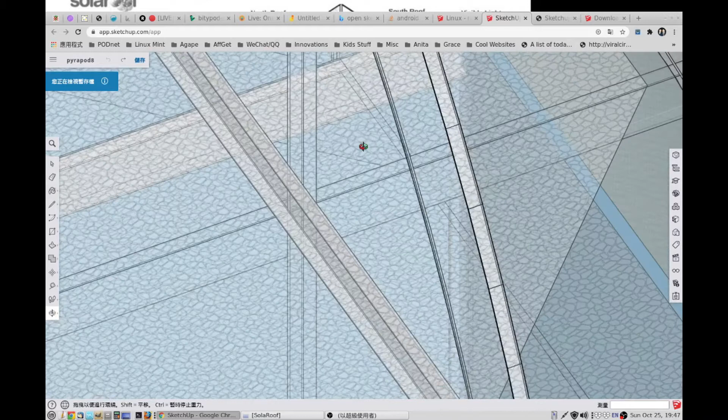From there we build the tic-tac-toe structure, but we build it one beam at a time. Let me zoom in to this area so you can see it's a steel piece — a vertical column, and then a U-shaped piece going this way, down, and then this way.

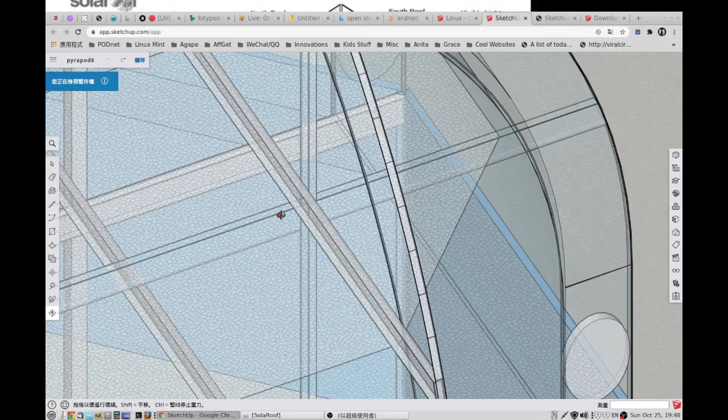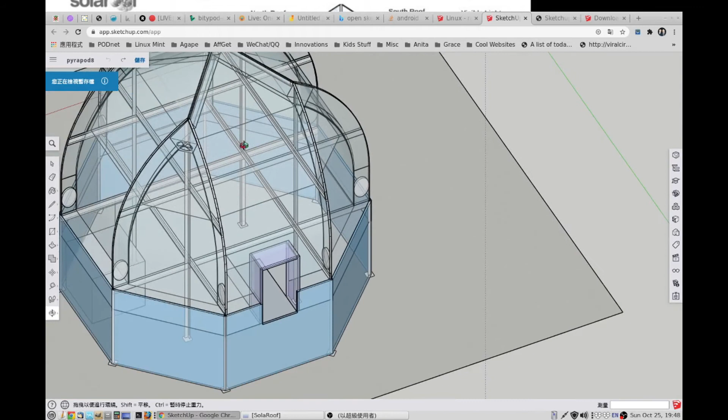So the beam is constructed this way. We're going to drill holes right here, two holes here, and the same for this piece. We'll use a bolt to tie it to the column. So there are 4 columns, and this way.

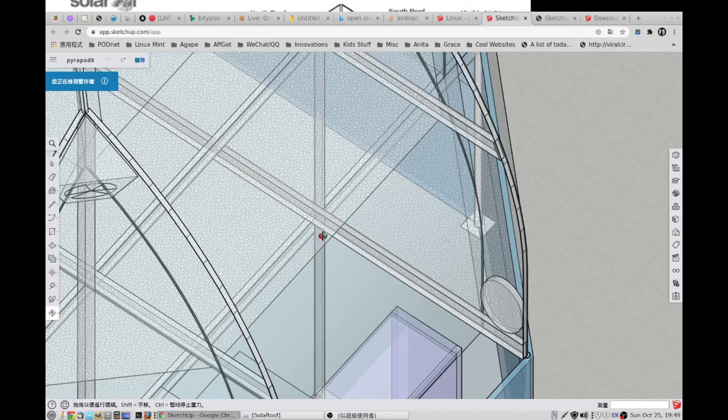We simply put each beam one by one. For example, for this section, we first do this one, tie it to the column, and once we finish this and that, we put this on top, just sitting on it. Then once we get the 4 columns up...

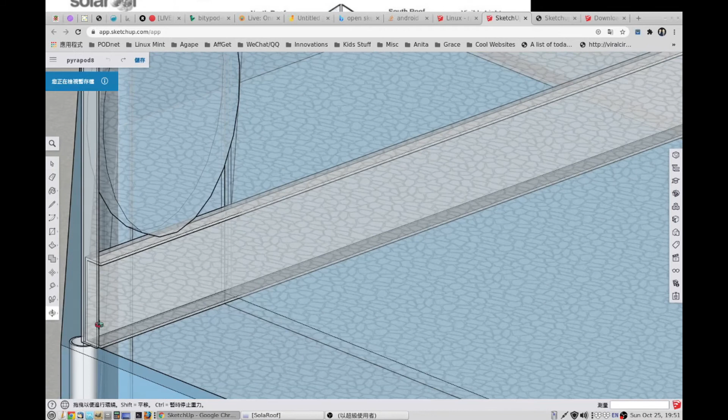On the end of each beam we do a cut here. When we ask the fabricator to make this for us, they will actually weld a piece over here to this horizontal beam, then drill 2 holes, and through those holes we tie up to this piece. We'll make it in a certain way so that the bolts are not protruding from here. So that's how it's constructed.

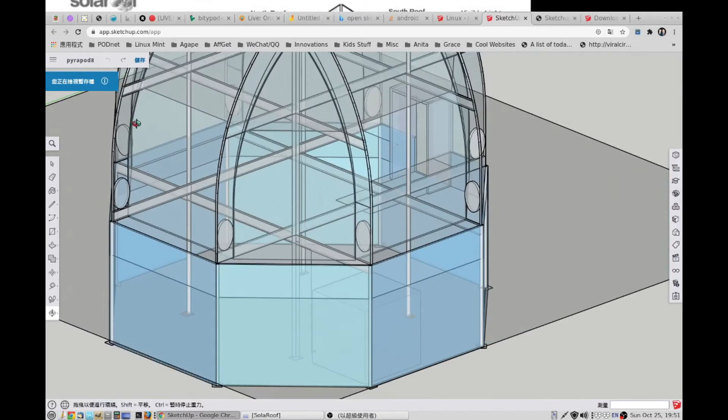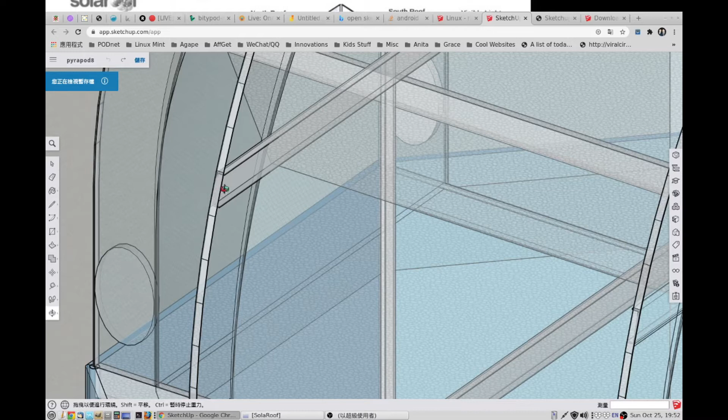Same thing over here — let's go here. This we simply cut at an angle, probably 70, I would just guess 75 degrees, so that this metal piece is attached. Same thing over here — we're going to ask the manufacturer to weld the piece with 2 holes, then use bolts to hold this piece against that, so it automatically bends according to that shape.

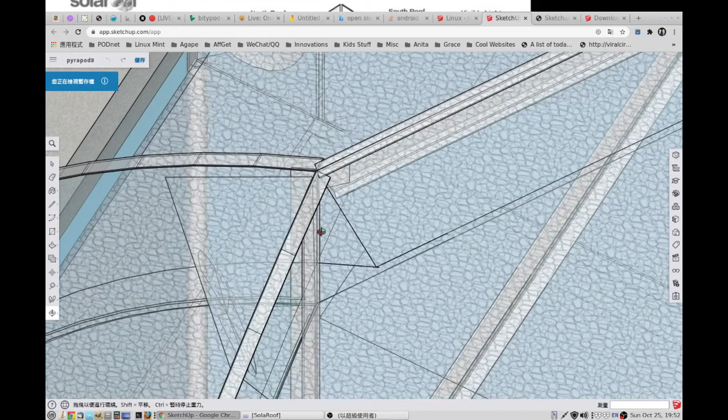Same thing over here, we do on the top. The top will be slightly — it will be something like this, basically a vertical column, and this thing will attach to that. The manufacturer will work on the details so they fit.

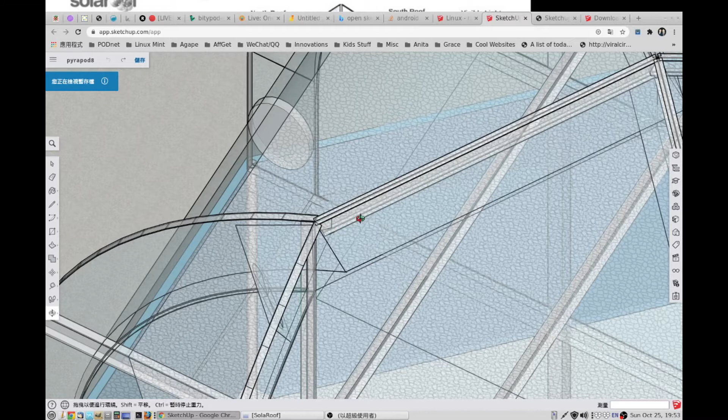And also from here we can use similar material — we're using the I-beam. If you cut the section, it will look like a capital I. We use that kind of beam to make the top for the pyramid. So that's basically roughly how the top for the pyramid joins together.

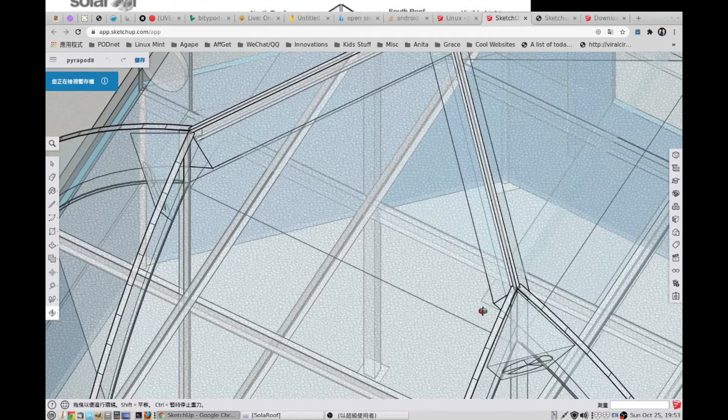This is just a simple illustration — the manufacturer will figure out how to actually do it. This isn't a detailed one, but it shows roughly how it's constructed.

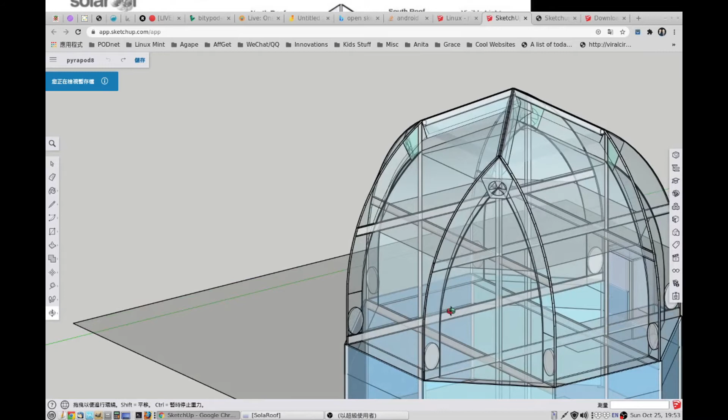So this way we got tic-tac-toe on this level, tic-tac-toe on this level, and at the bottom we design it so we dig 6 inches deep from this line. This line represents the grade level, the ground, and we dig below this, and that forms our fish tank floor — fish tank, soap/liquid tank, and maybe one more tank for domestic water. That's the bottom, and that's the general structure.

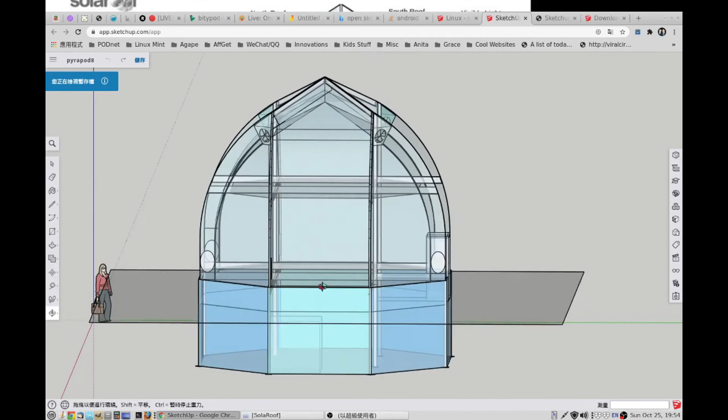And here's the entrance. So here's the entrance — basically the same, we build a platform.

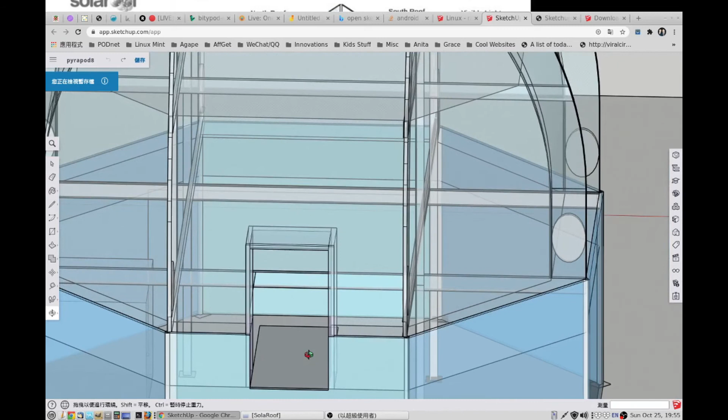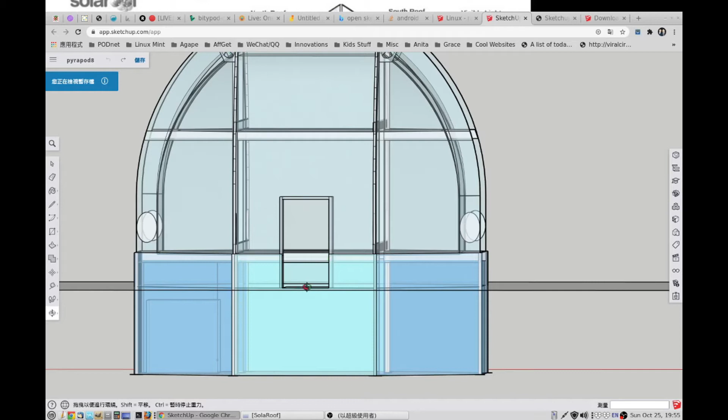We build a platform. We haven't even drawn the detail for the support for this platform, but something like this, right? You walk in and then you come to a platform, and then the second floor, this floor, it just... see here, when you're walking, then this floor is actually just 2 feet up from this level. Yeah, so that's how it is.

And we temporarily put the liquid soap tank there. We could actually move that tank to here, so that it's underneath, right? Just this platform would go above the soap liquid tank. But that's a small thing, I just wanted to let you see.

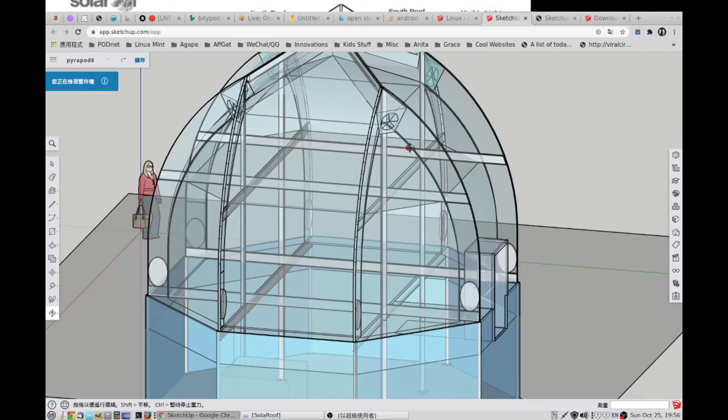As you can see, this is a double layer, double glazing structure, and this shows the cavity, right? This cavity, and yeah, we call it the quad panel, and this is the X panel. The reason we call it the X panel is because if you look from the top, you see this X shape, right? X structure, and this panel actually extends all the way to the top, so that's why we call it the X panel.

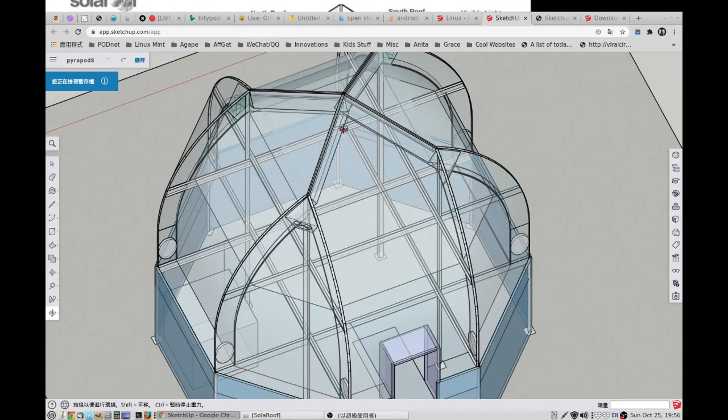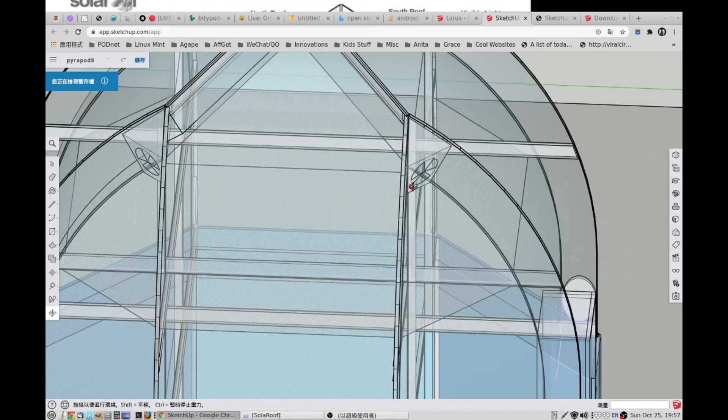This is the quad panel, and as you can see, the soap bubble generator is fit here. Probably we're gonna do this with 3D printing, right? 3D print this generator, so it fits perfectly into that corner. And that's how it is.

And I'll explain quickly, we're gonna have an animation, right? Once the animation comes, then you can see visually how things are moving around. Basically the liquid will be pumped from the tank, and then brought up to the 4 bubble generators, and then sprayed, right?

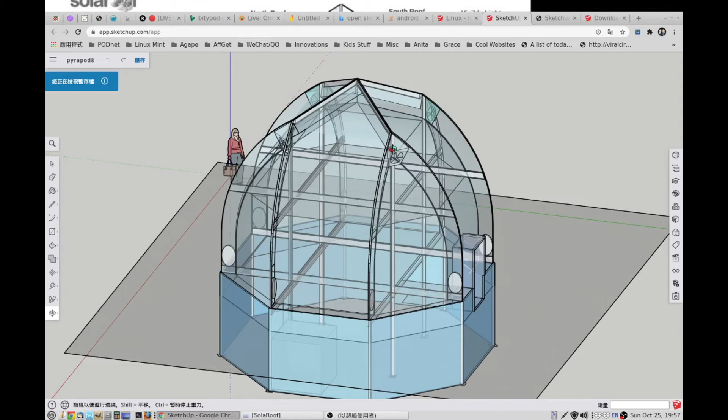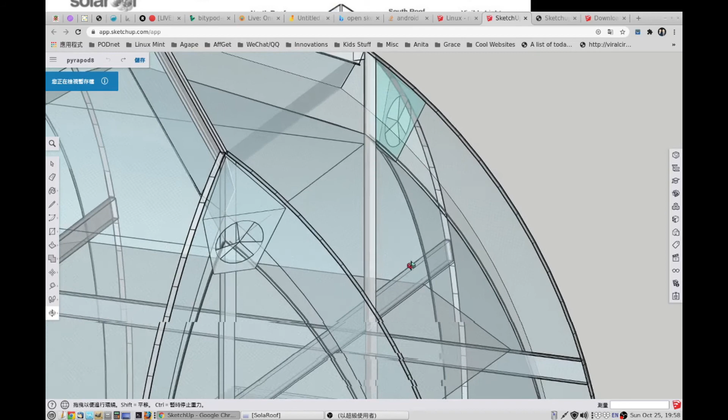Spray again onto this, so I'm gonna show you on the screen. The screen will be in this kind of light bluish color. So basically the liquid will spray here onto that screen, and also spray onto the other side. Remember this? This bubble generator has two sides.

Basically this face is the fan. The fan draws air from below. Okay, that's important. In the beginning I thought the bubble spit out from here, but actually it's the reverse. So in the beginning there's nothing, right? This is empty with only air. So the fan turns on and draws air from below, and then the air is pressurized and sprays out from this side and this side into the X panel cavity.

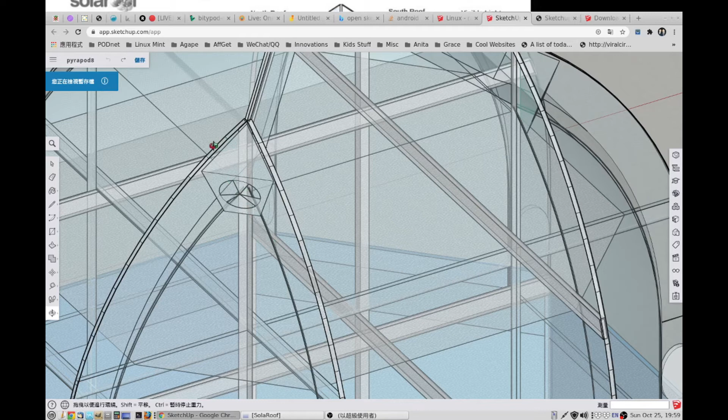Okay, so both ways. So as the soap liquid sprays onto those two screens, and the air will force them, right, and blow onto the screen, forming a lot of bubbles. So the bubbles will actually spit out, shooting up to the top, in this direction.

Actually, several of them also go this way and that way. So in this fashion, the top of this greenhouse, the top portion of the double layer cavity, will be filled with bubbles, and the bubbles, as they fill, will by gravity come down.

And as the air is drawn from this area, and then the air will be pushed in, there should be a balance, right? So basically if you don't spray any liquid, you can imagine how the air moves - the air is drawn from here and then spits out from here into this area, the X panel area, and the pressure will increase. Then that increased pressure will push the air back to the bottom, and flow back coming from here.

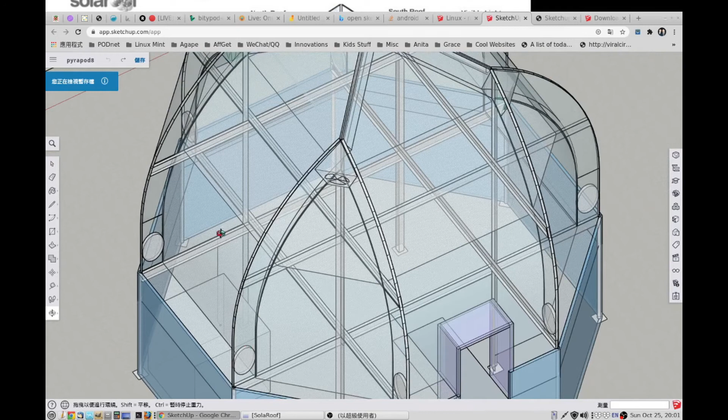So basically we're going to see a pattern, a flow of air going this way and going this way. Okay, so that's why we drew this kind of oval shape opening. This just shows how the air flows, and you can see it's roughly the same in the two areas, because we want a smooth flow of air. So it's the moving of air that draws and pushes the bubbles, creating the bubbles, and then also pushing the bubbles, and eventually, as the top is filled, the bubbles fall down.

And then eventually this area will be filled with bubbles, more and more, until to a point the tip, the top of the bubbles, will reach this fan, to a point that the bubbles are actually drawing into the fan and spitting out again. So if you don't stop it, the whole thing will just move in this fashion, which is actually hard to imagine, even for me in the first place.

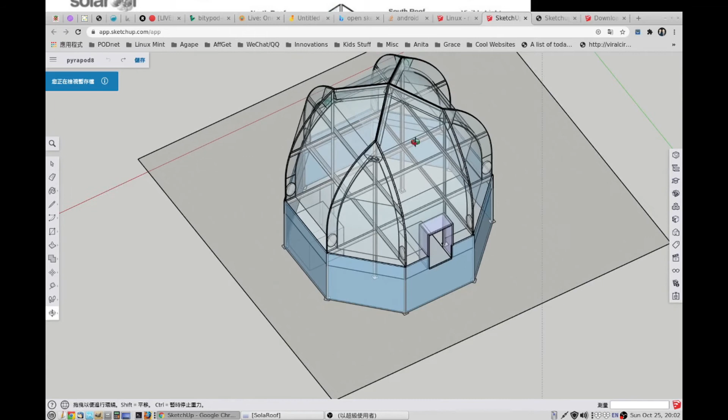Then that's critical, right? That is critical. Remember, this cavity, this double layer cavity, is actually sealed, completely sealed, with no air coming in and out. It's only the air drawing from one section, going through this process, and coming back. So it's a circulation of air. That's how it is. That's why it's critical to do it this way.

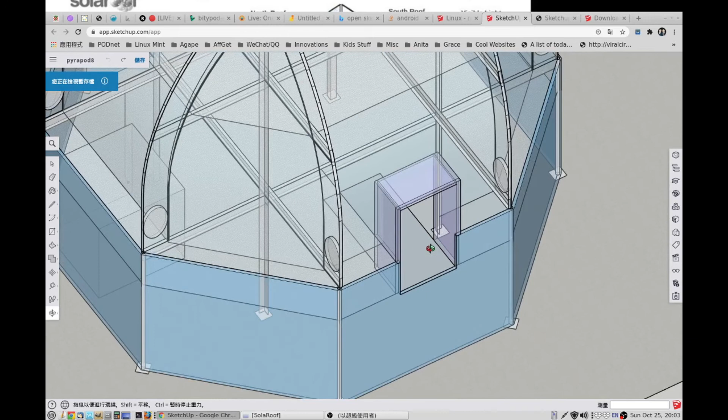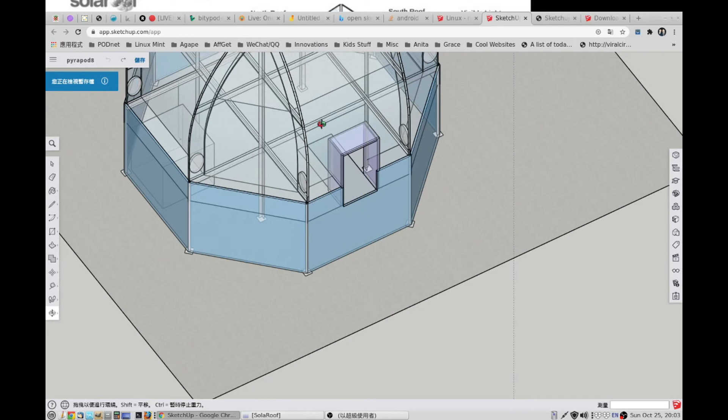And this is the passage. You see here the entrance, and between the outer layer and the inner layer, there's a distance, right? That's the cavity. So we have this door passage, doorway kind of, and then the platform. I think that explains most of the things you see.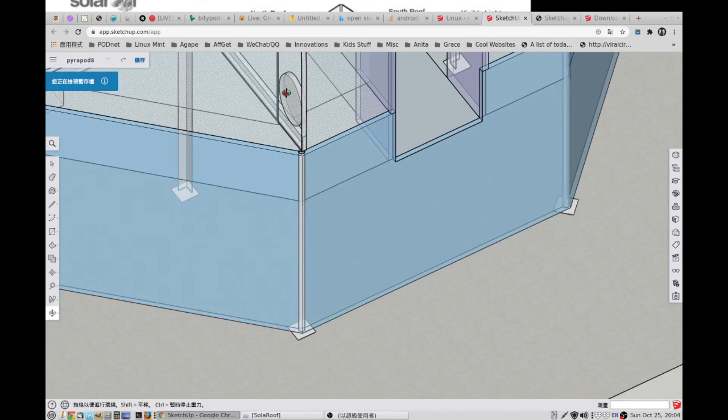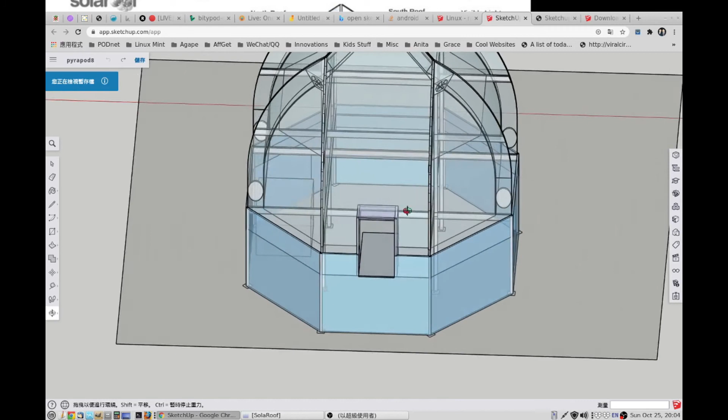And here we use it because this is below grade, so here we use a steel rod, a rounded steel rod with a base, and then the beam is simply placed on top of this round column, side column. I think that's it. So you get the idea, right? So you can maybe look at it. Very neat design, I think this is genius.

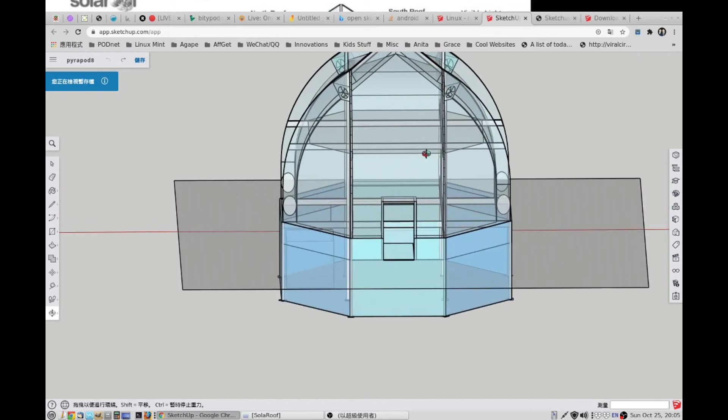This is genius, and I quickly explain, Richard explained also the exterior. It's double layer, right? The exterior covering is one piece, and the inner one we make it in a way that it looks like a bag.

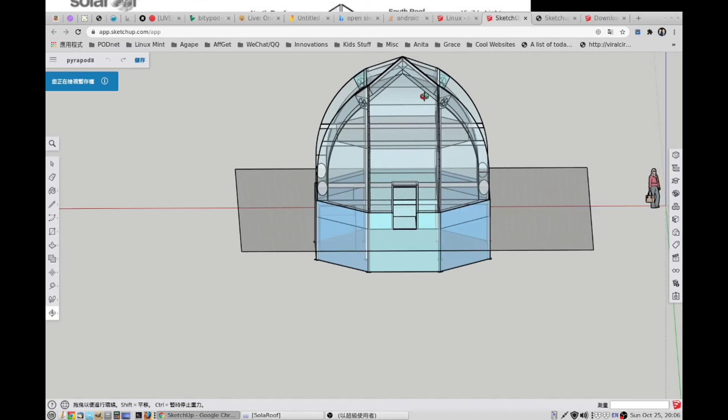It's a bag, and so for that we'll get into the detail. Basically this is a two-step process. One, we got the exterior covering. We'll ask someone to join the fabric for us and sew them together, and then cover it. And then we can start the inner work with this covering. And then we'll ask someone to come and check how we explain on site how we're gonna do the inner layer. The inner layer is a bit challenging, so they come on site and look at it, understand the whole process, and then they can make the bag. The inner section should be built separately, and then connect together.

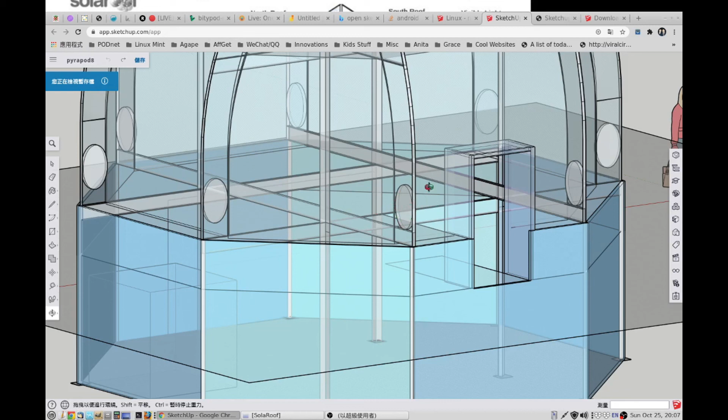For example, this area is double layer, but then we make a hole, like this, so that the two sections connect to each other, so that the falling bubbles can actually be pushed back to where the air is drawing from. Okay, so that's how it is. I hope you understand it.

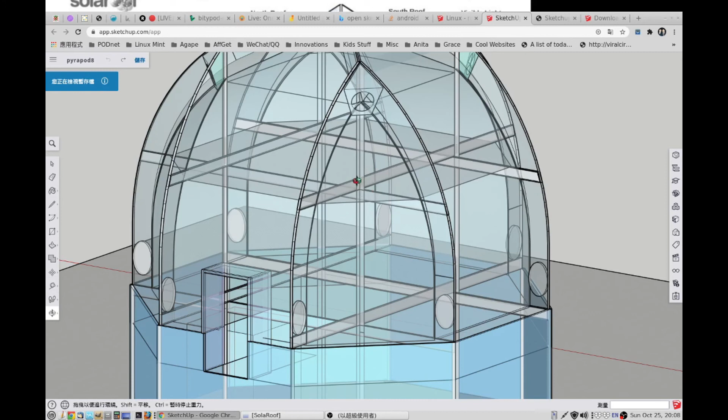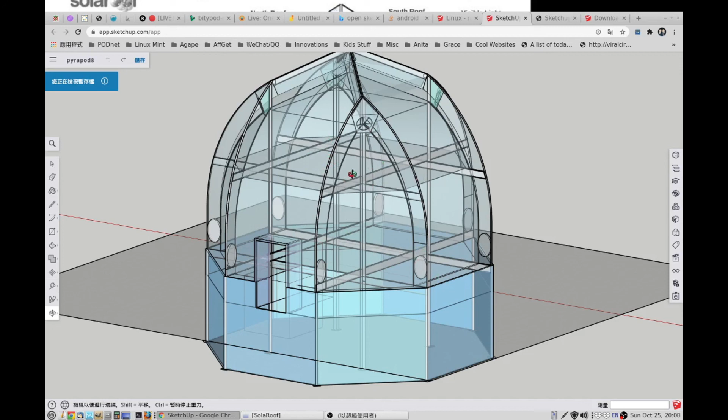I'll probably just insert some pictures showing how to make some joints. Basically this beam is roughly 24 feet, everywhere, almost everywhere. Here, here, and here, so 1, 2, the 4 pieces here and 4 pieces here, 8, right? Then 4 columns, that's 12 pieces. So 24 is a bit long for transportation.

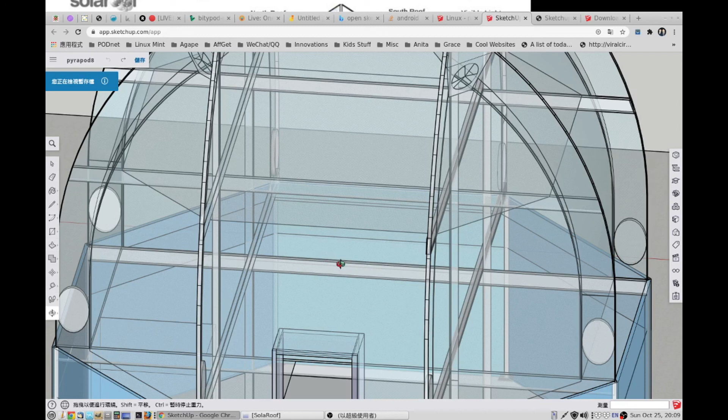So that's why I'll insert something to show how to break the 24 into half. A cut, basically a cut here, simple welding to weld a rectangular piece to the end, and same thing over here. So then 2 holes drilled, and then we use bolts to bolt them together. So that's how we break this beam, all the beams, into half, so that it's easy for transportation.

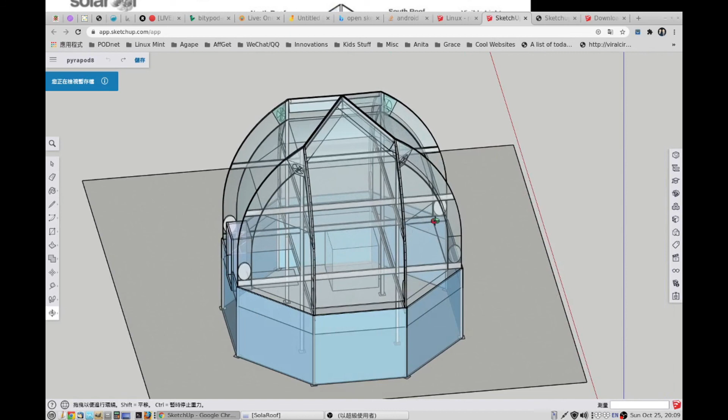Okay, that's all, as simple as that. Not too bad, right? I think once we get all the parts made, we can simply install on site.